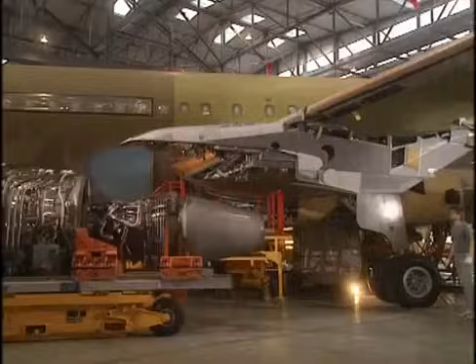The Airbus company, an international alliance of many aviation companies, came into being in the early 1970s and has grown steadily in stature until now, when most of the world's airlines fly some of the Airbus range of aircraft. There has been a design genesis that has encompassed short-haul, mid-range and long-haul solutions, and some notable variants. We investigate just how this success story has come to pass by focusing on the planes that are Airbus.

As soon as Wilbur and Orville Wright had landed and retrieved their craft at Kitty Hawk in the USA in the early part of the last century, the next questions were raised. Higher, further, faster, better. They had begun a chain of events that would change the world. There was a dramatic increase in the number and types of flying machines, some weird, some wonderful, but all exploring ways of getting men into the air in a powered and controlled manner.

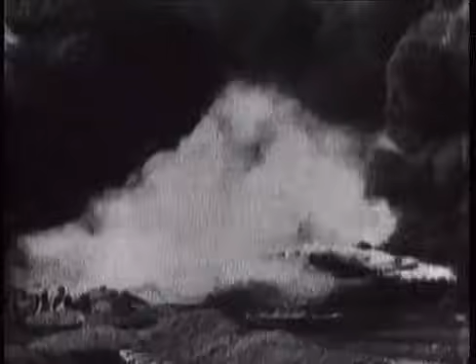Power and control were the main issues, and once the basic elements of taking off and landing had been mastered, the aspect of control became the next obstacle to aircraft development. World War I saw a rapid increase in technology as the warring nations sought to harness the advantage of powered flight. Britain, France, Germany and the USA formed their own air corps and produced relatively robust, efficient fighting machines. The wood, string, levers, wire and cloth had become lethal weapons in their own right.

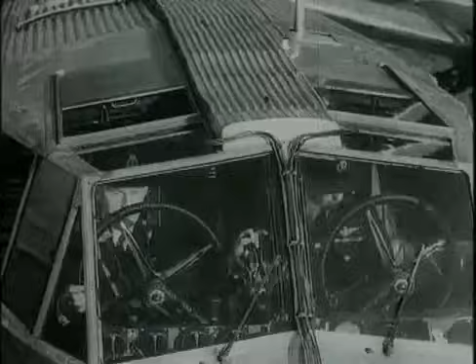The first transatlantic crossing in 1919 by the intrepid Englishmen Alcock and Brown in their slightly modified Vickers Vimy bomber aircraft caught the eye of the general public. Aircraft became fashionable and exhilarating fancies for those who could afford and dare to fly them, and air travel became a viable prospect. Aircraft that could carry a reasonable number of people as well as mail began to emerge, and with them blossomed the airline industry. To travel further with more people, bigger aircraft with more engines were built.

The open cockpit, wood, stick and wire, giving way to aluminium, glass and complex controls. Airline comfort and elegance reached its peak with the huge seaplanes, setting more and more records for distance and comfort, relying on the water for their takeoff and landing.

Civil aviation came to a sudden halt when World War II erupted. All focus was on the production of military machines, especially fighters and bombers. It was the accelerating development of the bomber with its need to carry a large payload over a long distance that formed the basis of design work for the new era of civil passenger aviation. But the jet fighters of the Luftwaffe and the RAF ushered in a new era of flying.

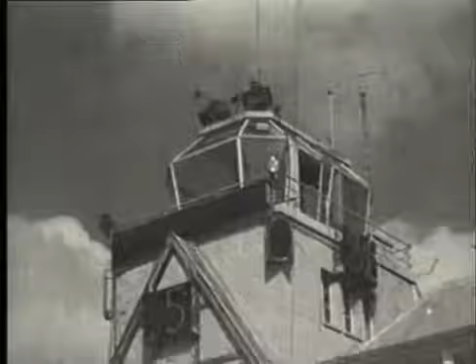Germany, France and England were almost bankrupt at the end of the conflict. Civil aviation was too much of a luxury, and European airlines initially had to make do with wartime aircraft. The manufacturing might of America had not suffered so badly, and so America was able to stake an early lead in the race to dominate the skies. Companies such as Boeing quickly used multi-engine propeller aircraft on internal flights, and the all-important transatlantic route became the key to large airline progress.

European companies concentrated on smaller routes on the continent until the arrival of the de Havilland Comet in the late 1950s, the first jet airliner in commercial service. In quick succession, the aircraft companies of Britain, France, Germany and Europe began building short-haul jets that proved economical, comfortable, reliable and efficient.

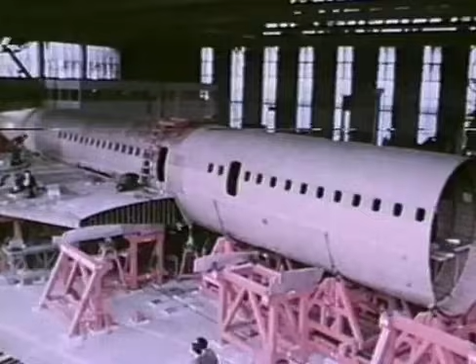In the mid-1960s, the EEC slowly came into being as European nation after nation signed up to the common market. The British and French governments recognized that working together could give better results, pooling ideas, technology, and expertise towards a common goal. Instead of trying to go bigger than the Americans, then why not go faster across the Atlantic? Enter Concorde, the world's first supersonic airliner. The Anglo-French creation was a technological masterpiece. Flying east to west across the Atlantic, you could actually land in New York 1 hour before you set off.

The plane was applauded worldwide and won great acclaim for its designers, but it never became a commercial success, Air France and British Airways being the only airlines that ordered and operated Concorde. The American authorities initially made it difficult to obtain permission to land near New York, a harbinger of difficult times ahead. The seeds of European cooperation were sown, but the Americans still dominated the aviation industry.

In 1967, French, German and British governments announced plans to build a European aircraft. The aim was also to challenge the Americans. However, a combination of politics, the economic legacy of Concorde, and the costly TSR-2 fiasco meant that 18 months later, the British government withdrew support. Hawker-Siddeley Aviation rather bravely funded the building and design of the wings themselves for the new Airbus, until the company was merged with BAC to become part of British Aerospace in 1977.

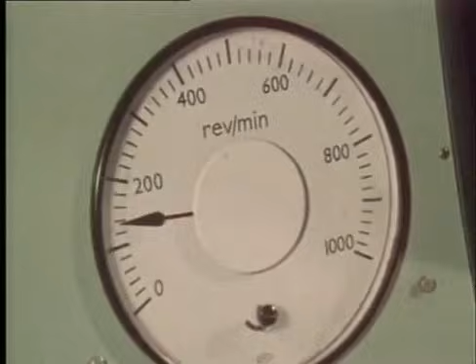At the Paris Air Show in May 1969, the A300B, the world's first twin-engine wide-body jet, is launched. It is to carry up to 250 passengers in a comfortable two-class layout, and later that year, Airbus secures its first potential order for 6 A300B2s, with a letter of intent from Air France.

December of the same year saw the Airbus Industrie GIE officially formed between Aerospatiale for France and a grouping of Germany's leading aircraft and manufacturing firms, later part of Deutsche Aerospace, with VFW Fokker of Holland and Hawker-Siddeley of Britain becoming associate partners.

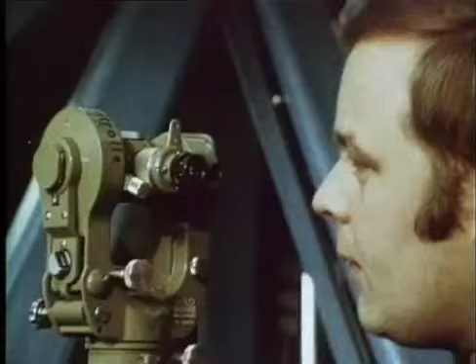Airbus Industrie was to provide a single sales, marketing and support network for Airbus customers. For the first time, not only was a brand new aircraft about to be produced, a brand new company and business concept too was to emerge, spanning many nations, languages, customs and expertise.

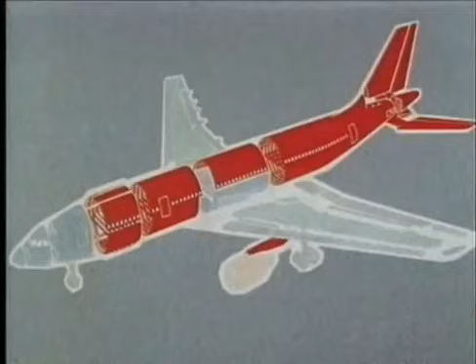The allocation of building sections of the aircraft was closely scrutinised and based on existing skills in national companies. Deutsche Airbus near Hamburg had responsibility for the main fuselage. Hawker Siddeley in Britain began work on the wings. Aerospatiale in France were the main assembly point in Toulouse, with the cockpit and centre section being produced at Saint-Nazaire. A few years later, the Spanish company CASA would come on board to build the tailplanes in Madrid.

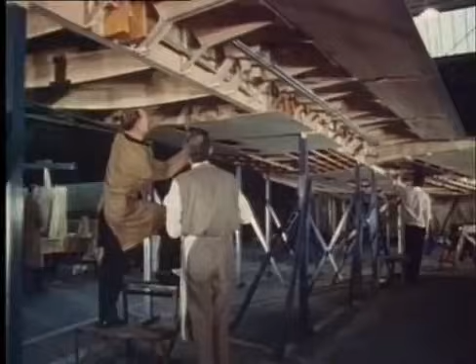In the late 60s and 70s, it must be remembered that there was not the technology available to today's designers. Wooden mock-ups were still made of the wings by Hawker Siddeley. Computer simulation, or CAD, was still a dream. Feet and inches, pounds and stones still vied with millimetres, kilograms and kilometres.

Today, a designer can email or video conference immediately with a colleague in Toulouse or Holland. Information, queries and ideas can be shared instantaneously via the internet. Back in the late 60s and 70s, the slide rule was king, and the experience gained from the early jets and Concorde production became invaluable. Testing was generally done to destruction to ascertain stress capabilities, even simulating a bird strike using a special air cannon.

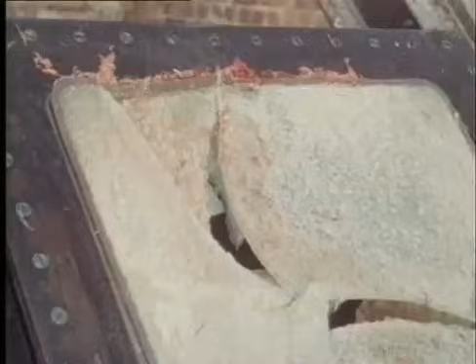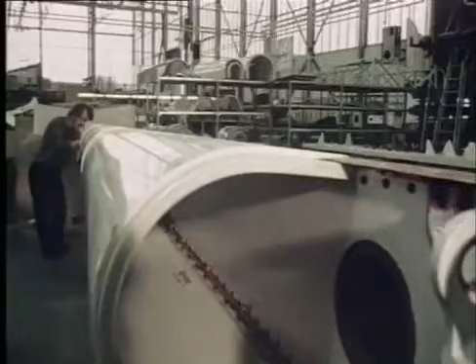And as none of the companies had successfully produced a wide-body jet airliner before, the risks were enormous. It wasn't just the technology that was needed to make this project happen. The people and expertise, both on the technical and management side, were equally as important. To successfully combine the skills, ideas, fears and strengths of several nations, companies required great tact, diplomacy and clarity of vision. In a series of groundbreaking moves with parallel moments of uncertainty and optimism, the first A300 began to take shape. It was the first wide-body jet of its type ever, and the first airliner ever to be built by several nations at once.

Immediately, there were difficulties. The first choice engine, the Rolls-Royce RB211, was dropped after Rolls sold the design to the American TriStar jet and lost interest in the Airbus project. In a remarkable yet pragmatic turnaround, Airbus arranged to test the American-built General Electric CF6 engine on a B-52, found it to be remarkably fuel-efficient and powerful, and incorporated it into the design. The engines were further tested at extreme temperatures and conditions designed to highlight any possible flaws.

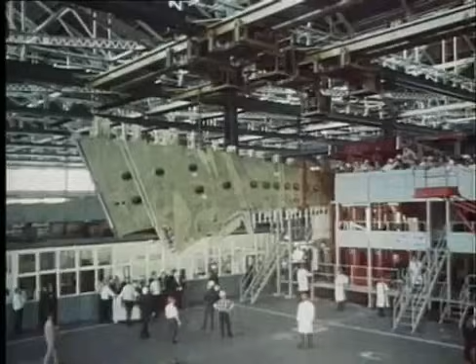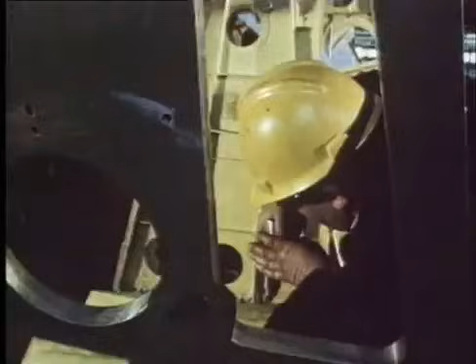The spirit of cooperation and dedication to the cause pushed Hawker Siddeley to introduce expensive new digital tooling machines, crude by today's standards, but at the time revolutionary and symbolic of the highly technical and energetic approach to the project. Wings were built in vertical jigs, with the leading and trailing edges fitted separately. Airbus pioneered the use of advanced composite materials on the A300B, and CASA in Spain began incorporating them in secondary structures such as tail fins and leading edges.

Deutsche Airbus produced the central fuselage in huge jigs, again with little computerized technology, a testament to the skill and engineering expertise of all involved. A full sense of European cooperation was beginning to emerge, and there was a certain pride in being part of a new special international community.

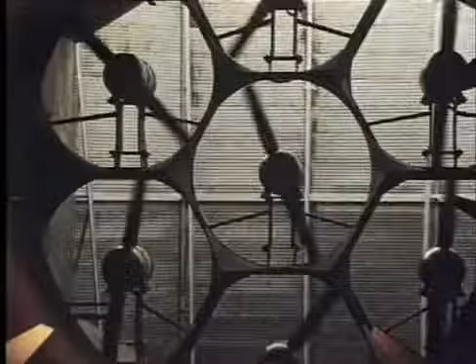The sites were widespread. Hawker in Chester, England, Deutsche Airbus in Hamburg, Germany, Aerospatiale in Saint-Nazaire, northwestern France and Nantes, and of course the final Airbus assembly plant in Toulouse, southwestern France. Designing the separate sections and building them was one thing. Getting them to Toulouse for the final assembly was another.

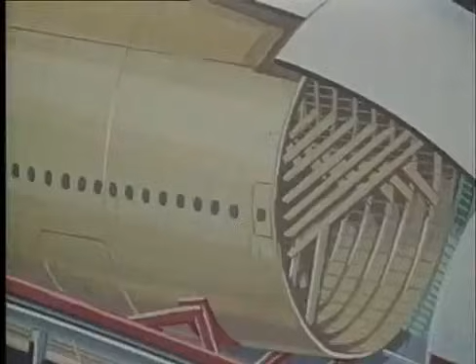With their first aircraft in several pieces and a letter of intent from Air France for 6 A300B2s, there was no time to spare. Obviously, air transport was needed to carry the sections to and from the various sites, and initial procurement made, but no one could wait for an aerial transporter to be built or adapted. So road transport and ferries were used.

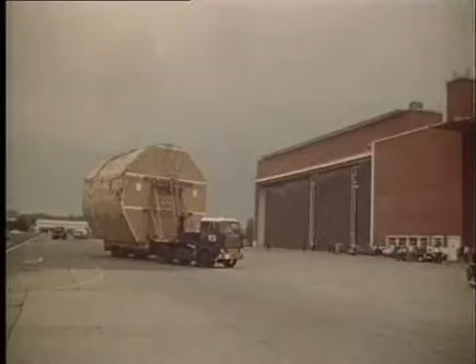The huge loads caused a lot of excitement and chaos on the road, as phone lines, power lines and trees were always an obstacle. But the sections had to get through to the plant for assembly. Many people watching the spectacle did not comprehend that they were seeing the unification of a pan-European project, as the huge loads gently nudged their way through villages and towns day and night. This is still the case even today on routes to and from the airports.

Conscious of the need for speed in 1972, and again with remarkable boldness, to improve the transportation process, Airbus bought and modified an American Boeing Stratocruiser, followed quickly by 3 more. In 1972, these 4 Super Guppies began commuting between the Airbus plants. The transporters were powered by 4 Allison 501 propeller turbines, derived from the Boeing model B377 and also used in the NASA spaceflight programs.

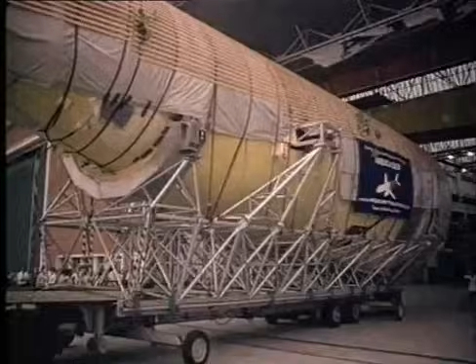As Airbus Industrie grew with rising production rates, the Guppies eventually arrived at the limit of their capacity and age. So, Deutsche Airbus and Aerospatiale formed the Special Aircraft Transport International Company, SATIC, in October 1991, and began to develop one of their own aircraft to become the new supertransporter. This arcane but practical transportation got the parts of the first Airbus A300 to the Toulouse plant, and work began on assembling them immediately.

1972 was a busy year for Airbus on many fronts. True to its original concept, Airbus Industrie was not just building aircraft, it was selling them too. Mock-ups of the interiors were made to show prospective customers what could be done with this wide-bodied airliner. Training of pilots began in earnest with the A300 simulator, setting in motion the practice of allowing pilots to cross-train from type to type with less difficulty and introducing the early concept of commonality.

A short time after assembly began, Air France officially became Airbus's first customer, placing a firm order for 6 A300B2s, a 270-seat stretch version of the original A300B they originally requested. This order was followed sometime later by Spain's Iberian Airways. In January 1972, the Spanish company CASA is officially awarded the contract to build the horizontal tail parts of the aircraft and joins the consortium, taking a 4.2% stake and developing the use of weight-saving new composite materials.

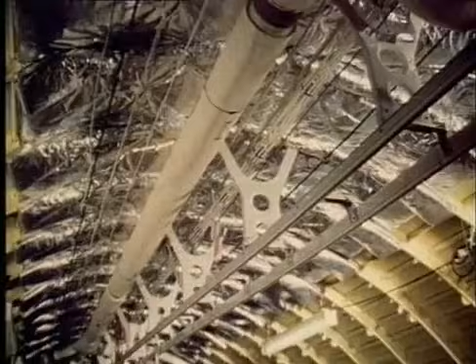As production of the A300 continued apace, the A300B4, a longer-range version of the A300, was launched, with a range of 3,000 nautical miles compared to the 1,200 nautical miles of the original A300. Its maximum takeoff weight at 165 tons is also greater than that of the A300B2. As well as the introduction of the composite sections of the aircraft's fin, leading and trailing edges and radome, the A300 also featured advanced rear-loaded aerofoil, giving a greater aerodynamic efficiency of the wing, and full flight regime auto-throttle and automatic wind shear protection, putting it well ahead of its competitors.

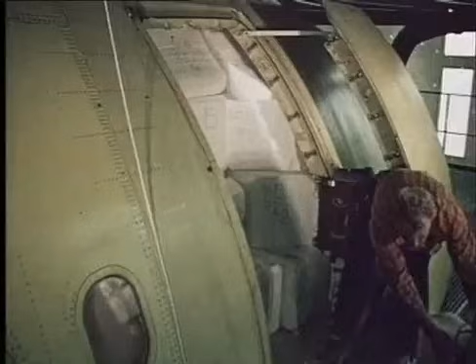The rollout was performed jointly with the appearance of Concorde Mark II. A300 was the airline industry's first twin-engine wide-bodied aircraft, and it soon began to be noticed. Detailed testing of all areas followed. The cabin resistance to air pressure was calibrated. Foam blocks were used to reduce the volume of interior space, so less air is needed and a more accurate result obtained. In these pre-computer design days, hydraulic rams were used to simulate and exceed the stresses that could be imposed upon the airframe. Early punch code computers recorded the data.

The A300's maiden flight took place on October the 28th, a month ahead of schedule, despite several delays due to bad weather. The flight crew of Captain Max Fischl, Bernard Ziegler, Gunther Scherer, Pierre Caneill and Romeo Zinzoni nervously began pre-flight checks.

The A300, the first Airbus aircraft and first wide-body twin-engine jetliner, took off at 10:30 a.m. local time from Toulouse Airport for a mission lasting for 1 hour and 23 minutes. A thorough in-flight check of all systems was undertaken, both on board the aircraft and from the supporting teams.

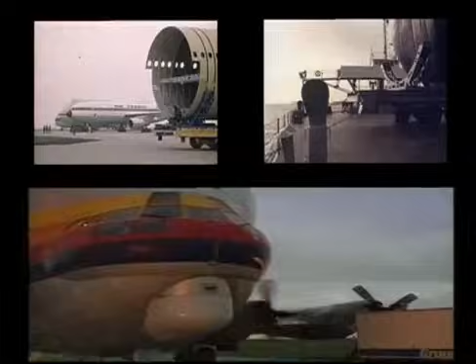In March 1974, the A300B2 received certification from French and German aviation authorities, ahead of schedule and on budget, which meant it could be delivered to its new owners. Air France took delivery on the 10th of May, entering the A300B2 into service on the 23rd by flying from Paris to London.

The aircraft now began a whistle-stop sales tour of the world's possible clients, landing and taking off at major airports and air shows around the globe, especially North and South America. Nothing sells an aircraft like the aircraft itself, and the orders start to roll in as the Airbus story accelerates.

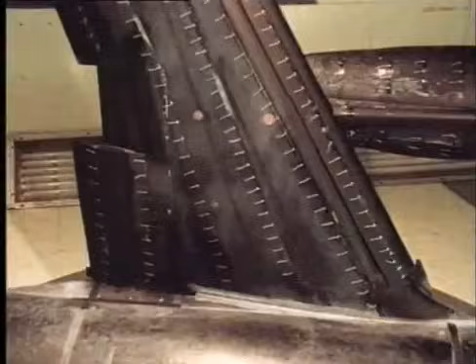Development work, however, was forging ahead, and the Cat 3A Autoland system was added to the A300, allowing the aircraft to land automatically in poor visibility. It took a former NASA astronaut, Frank Borman, heading up Eastern Airlines, to be the first American airline to step up to the mark and take a leasing deal on 4 A300s in May 1977.

The US market had started to crack, and 11 months later, when Eastern ordered 23 A300s with a further 9 on option, the rest of the world finally began to take the Airbus consortium seriously. More orders came quickly, and Airbus became established as a lead player in the airline business. As the product range was developing, taking on board new technical innovations and adapting to more markets and customer demand, so the company itself was developing.

The British air industry in the late 1970s underwent a major shake-up, and after several mergers and acquisitions, including the takeover of Hawker Siddeley, British Aerospace was formed, and joined Airbus Industrie in 1979 as a full partner, taking a 20% share, raising the profile and capability of the European venture and firmly uniting Europe's leading aircraft manufacturers. Just prior to this, the smaller but longer range A310 was launched, with even more technological advances.

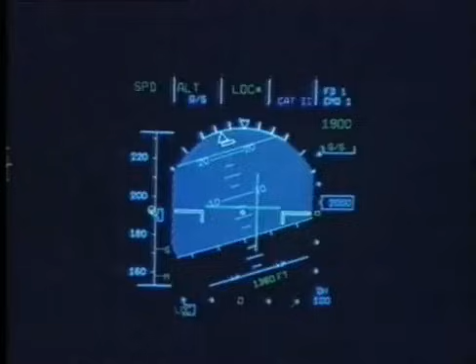With the A300-600 and A310, Airbus first develops the concept of commonality. This meant that for the first time, a twin-aisle aircraft could be piloted by a two-man crew, using instruments located in front and above, without the need for a third crew member, usually referred to as the flight engineer.

The introduction of cathode ray tubes, or CRTs, was also a revolutionary innovation. The old dials and needles were soon to become a thing of the past. Airlines around the world began placing orders for this aircraft, from Saudi Arabia to American Airlines. Airbus established its presence worldwide and as a world leader.

The aircraft industry has its own idiosyncrasies. Large freight carriers such as FedEx, UPS, DHL, TNT and others were looking for a freighter, and they selected the 222-inch fuselage cross-section for the original A300B jetliner. This sizing not only created one of the most comfortable passenger cabins ever designed, it also provided spacious lower deck holds, capable of accommodating the industry-standard LD3 containers side by side, or standard pallets, as well as a voluminous main deck with excellent cargo capacity.

An A300B4 configured as a freighter has a 43 metric ton cargo capacity at a range of over 2,000 nautical miles, 3,700 kilometers. And 1978 sees the launch of the convertible A300B4 passenger cargo aircraft, aimed at the developing Middle and Far Eastern countries. These additional markets were to prove useful to Airbus Industrie as the passenger markets fluctuated in their buying cycles.

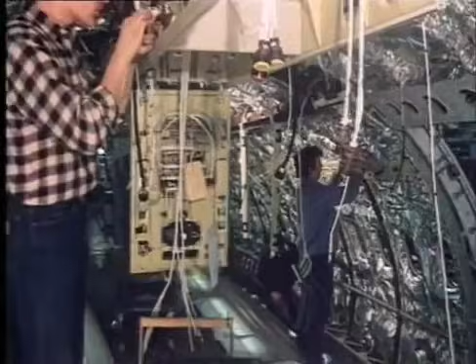The A310, seating 218 passengers, aims to offer airlines a smaller, longer-range alternative to the A300. Its launch shows Airbus to be more than a one-aircraft manufacturer. The commonality factor means that essential parts, sections, procedures and training can be shared by aircrew and ground crew, not only saving on initial cost, but also increasing enormously the after-sales support and service offered by the company in all parts of the world. Airbus again went up a gear in the eyes of the world's major airlines.

In 1981, the first A310-200 rolls off the final assembly line in Toulouse, almost 10 years after the rollout of the first Airbus aircraft, the A300B. Only 6 computers are needed to run the aircraft's autopilot, autothrust and flight director, as opposed to the 18 computers required on the A300B2 and A300B4, which used analog technology.

The A310-200 entered service with Swissair in April 1983, and almost immediately the go-ahead is given for the A310-300, which again incorporated new innovations, such as using composites in primary structures like the fin, and becoming the first civil aircraft to feature the drag-reducing wingtip extensions.

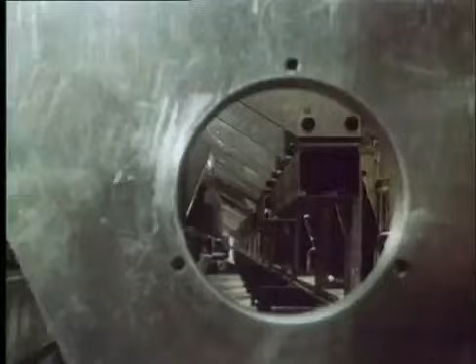Within the family structure, the longer-range A300-600R has been developed, giving longer range and aimed at a definite market, the Americans. From the early, heady days of optimistic dreams and challenging political and technical reality, the team at Airbus has ushered in a new era of aircraft, broken into new and bigger markets, and proved themselves capable of taking their place at the leading edge of aircraft design, manufacture, production and delivery. And the story is only just beginning.

Having begun to establish itself as a world player, Airbus looked at the medium-haul range in different areas of the world. And to replace the aging global fleet of existing aircraft, they set about designing the A320 family of twin-engined, single-aisle jets.

The A320 was revolutionary in many aspects. It was the first to be completely designed on computer, the first to make significant use of composites in major parts of its airframe. It introduced the forward-facing cockpit with cathode ray screens, and it was the first to feature fly-by-wire technology. To keep up the momentum of the development cycle, one A300 was fitted with most of the new technical systems, including fly-by-wire, and advanced technical apparatus which help speed up flight testing and monitor results.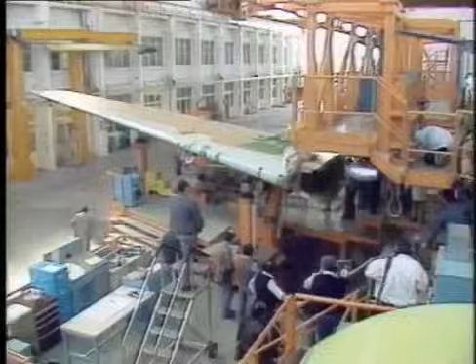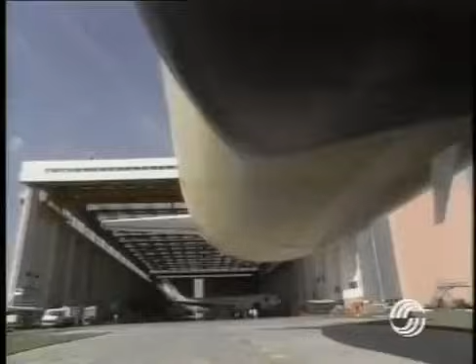In Toulouse 1986, the A320 began to take shape, the parts, as before, arriving from different European countries, CASA in Spain increasing the use of composites in the tail section. The engines chosen for this smaller jet were the CFM56 turbofan and International Aero Engines V2500. Section by section, the plane was assembled and tested on the ground. Resting on its own undercarriage is just one of the major steps for a new airliner. Prior to painting or public rollout and first flight, the aircraft is fitted with engines of the same weight to aid structural testing. These will be changed for the CFM56s later in December of this year.

The maiden flight takes place early next year, February 1987. Europe's Airbus 320, the third airliner of the range so far, is about to take to the skies for the first time. Past success with the A300 and 310 aircraft, and Airbus's reputation, mean that orders for the new jet are already accumulating. The highest ever figure of orders placed, 600 so far, before the aircraft completes its commercial certification program. Happily, the maiden flight is completed without any major problems, and certification and marketing begin.

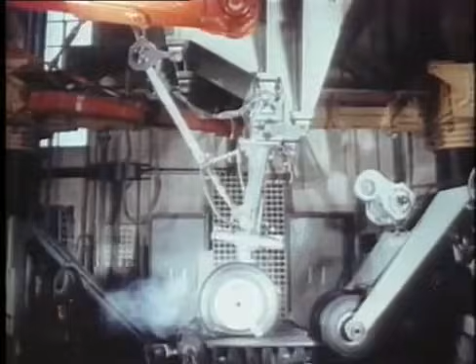Extreme can also mean cold, very cold. The Arctic wastes of Sweden provide night temperatures of below -20 degrees centigrade. After a night and a day in these conditions, the aircraft is found to be working perfectly. One of the more dramatic tests involves the skid rail and rear fuselage testing, as well as repeat heavy landings and takeoffs with the undercarriage. Even the air cannon is used to simulate bird strikes against the windshield, and the engines also undergo stringent testing with foreign objects.

One important aspect of the A320 testing involves monitoring the crew for stress and behaviour patterns with the new technologies. All these and more tests are thoroughly applied, and finally the aircraft receives its certification.

Rollout of a new aircraft is a very prestigious affair, akin to the launching of the great ocean liners of the past, especially when Airbus is the symbol of European cooperation and technical expertise. Dignitaries from all over Europe and the world's media welcomed the dramatic rollout of the A320.

With the order books filling up and airlines from many nations taking up the short to medium-haul aircraft, production went into top gear. The various companies from around Europe producing the respective parts, transporting them with the supertransporter and assembling them in Toulouse. The technical innovations of this aircraft allowed it to be flown easily and efficiently on many routes, expanding air travel even further.

Production of the A320 rose to 10 aircraft per month as the world's airlines began to exploit the emerging short-haul market, competing directly with road and rail transport. Once the air industry's underdog, the fortunes of Airbus were improving dramatically. The A320 was the first civilian airliner to introduce fly-by-wire technology, a massive step forward in control and safety in the air.

In the early years of flight, sheer muscle power was all that was needed to operate the stick that controlled the aircraft surfaces. As aircraft grew larger, the control surfaces became bigger, and forces generated were too great for mere muscle. Some ingenious designs were incorporated to help this. One of the earliest steps to assisted flight control was with the flying boats. The wheels and pulleys involved became quite common in many aircraft of the time to deal with the sheer muscle power needed to maneuver these craft. Some seaplanes began to use electrical servo assistance for the control surfaces.

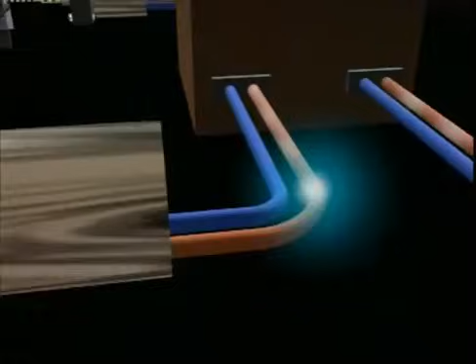With bigger aircraft and the civil aviation expansion in the 1950s, more control was needed. The Princess used electric servos to operate the different surfaces. Without these, she would not be capable of maintaining any flight stability or control. Soon, nearly all aircraft were using servos of one kind or another to operate the flaps, rudders and tail areas. These surfaces were, however, still linked to a complicated matrix of mechanical levers, rods and hydraulic motors activated by electrical signals.

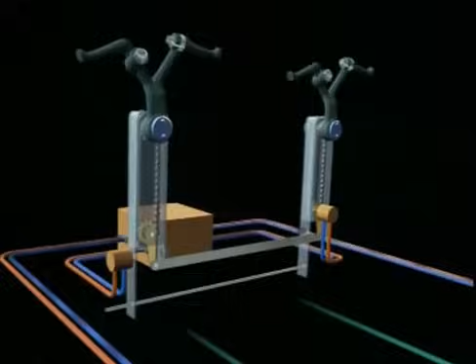The next logical step was to link the motors that moved the control surfaces to the cockpit by electrical wire. This was much simpler, lighter and safer. This also meant that the traditional columns or control yokes could be replaced by smaller side sticks. This revolutionary leap forward, along with the new display systems and forward-facing cockpit, made the A320 the most technologically advanced airliner of its time. I love flying our fly-by-wire aeroplanes.

William Wainwright, chief test pilot at the time for Airbus, takes us through some of the features of fly-by-wire. Now we have electric signalling, and I'm back to my small side stick, which I move with my fingertips, just like that. That moves the aeroplane. To illustrate what I mean about going to maximum performance easily, let's just slow down to our so-called alpha max, which is just before the stall. First of all, I need to reduce the engine thrust. Then the aeroplane slows down, but still with quite light forces.

I pull the stick fully back, and I keep pulling it back. There we are. It's going back towards 100 knots. And now all I'm doing is holding the stick fully back, and the aeroplane will stabilise just above the stall. Feel it's buffeting a little bit. That shows that we're not very far away from the stall, but we won't stall. We can sit there all day.

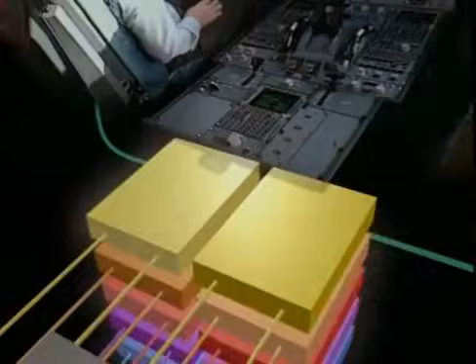Safety is obviously of paramount importance, and in order to ensure that there are no technical failures with these systems, 5 separate computers are used in the control system, each individually capable of assisting the pilot, and to provide even greater redundancy insurance, each computer is comprised of 2 units, one monitoring the other. To provide an additional level of security, the computers are designed and built by different manufacturers and programmed by different software teams, so that any unforeseen technical faults will not affect all the computers on board.

They also have a direct benefit to the human element of flight. They help me by making the aeroplane much more pleasant to fly. They smooth out all the nasty characteristics that some aeroplanes have, like big trim changes with speed or weight, changes in pitching moments with applications of thrust. That can all be taken out by these computers.

The computer systems also introduce the benefits of commonality in the Airbus family, making the aircraft very similar to fly. There are also several benefits to airline companies with this kind of technology. This commonality of flight systems was also applied to the airframe, and the adaptability of the A320 is evident in later models.

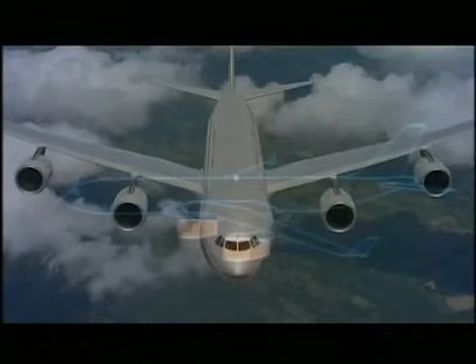The new family of A330s and A340s were aimed at the medium to long haul and also the very long haul market. The common use of fuselage, cockpit and main wing meant that Airbus could cut development costs and time. Customers could also achieve greater reliability, efficiency and service.

Savings were made in spares, training and maintenance, as well as operating costs. The main difference between the types was based on the number of engines, and at the time of launching these models, much technical research was conducted to achieve maximum efficiency in this market, explained here by one of the early

design engineers. We'll start with a common airframe featuring a twin-aisle fuselage seating 300 passengers and dimensionally identical wings and tail surfaces. And we'll look at the three configurations currently offered to airlines: the twin, the quad, and the tri-jet.

Extra weight at the back there, both due to the engine itself and the need to strengthen the rear fuselage to carry it. So to redress the balance, the wing must be placed further aft. Now, the length of the moment arm and the dimensions of the tail surfaces are directly linked. If the moment arm is shortened, it'll reduce the tail's efficiency. To compensate, we need either bigger, draggier tail surfaces or a complex full-time longitudinal stability augmentation system.

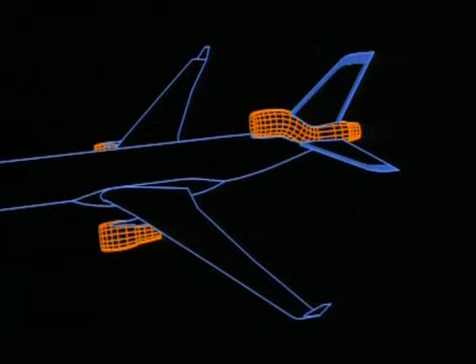So Airbus concentrated on two designs, the twin-engine wide-body A330 and the four-engined wide-body A340. If four engines are reduced to two, the two will need to be larger, much larger in the case of the twin designed for very long ranges. Why? Because the extremely heavy load carried calls not only for high power, but for very high reserve power to meet the single engine out requirement.

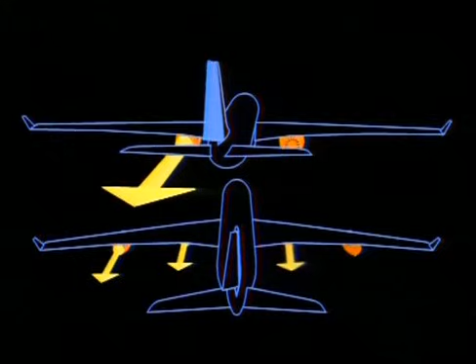In a twin, an engine failure results in a 50% power loss. And for the long-range twin, this must be offset by very high thrust indeed, on one side only. The quad is much less affected, with one engine representing only 25% of the installed thrust, and the reserve power is more evenly distributed. The imbalance that both aircraft now suffer must be compensated for by the rudder. The long-range twin rudder has a much more demanding task and must be made bigger, and the consequence? Higher drag in the cruise.

Research and development to match potential customer requirements was begun as early as 1987. And as a testament to Airbus's information flow, input was also included from airlines' own representatives. The increasing use of better computer design systems and electronic communications built on the earlier technological advances and helped enormously in decreasing testing time and refining production methods. The very early methods of wooden mock-ups, cabin interior construction and expensive wind tunnel tests began to look very dated.

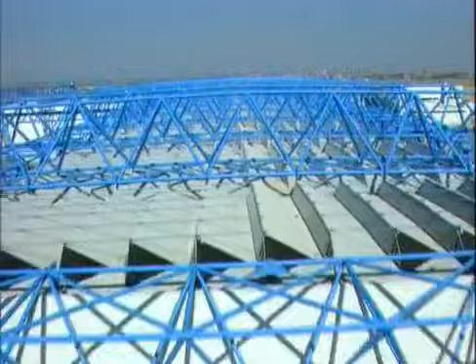To house such a large enterprise, another production facility was commissioned and additional investment raised for the next stage of the Airbus expansion. The main production area for the 330-340 at Toulouse became the largest single-span building in Europe. Called Clément Ader, after the French aviation pioneer who invented the word avion, this massive building heralded the next expansion phase of Airbus Industries. The production techniques were developing, as was the partner base.

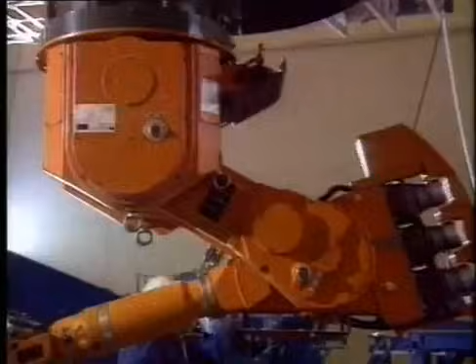Now using a modular assembly process instead of the traditional production line, parts of the Airbus can be assembled in different hangars and fitted together at specific production points. The influence of new technology is evident as robots and computers are now heavily used in the design process, cutting and assembly. British Aerospace at Chester builds the wings for the A330-340 program, although final assembly is now done by Deutsche Airbus in Germany.

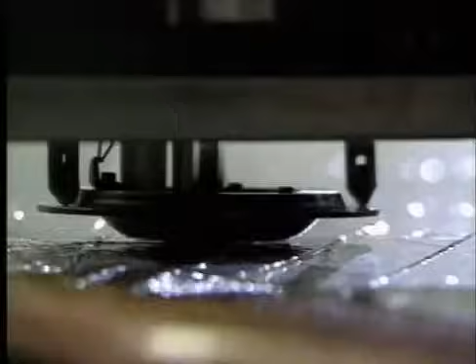Deutsche Airbus, as part of the Deutsche Aerospace, assemble fuselages in Bremen and Hamburg, as well as assembling the A321. Aerospatiale also produced several sub-assemblies such as cockpits and central sections, as well as final aircraft assembly in Toulouse. CASA in Spain have increased their workload, especially with their high-tech composite parts.

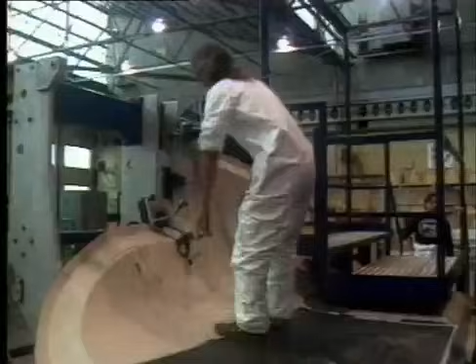But Airbus has also expanded its partner base to include wider international partners, such as Belairbus, who produce these honeycomb parts. Canadair in Montreal and even Australian companies are now important subcontractors to British Aerospace and the Airbus program. Even as far afield as South Korea, parts are made for Airbus.

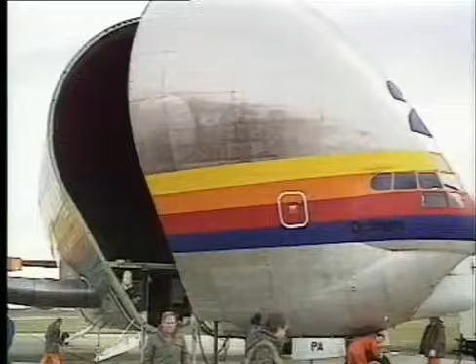There are several engine types for the A330-340 program. CFM56-5Cs are for the A340, while the A330 has a range of engine choices: CF6-80E1s, Pratt & Whitney 4000s and Rolls-Royce Trent 700s. The scale of production meant that the Super Guppy fleet was still employed to ferry parts around Europe.

But on the intercontinental routes, the Soviet-built Super Antonov was used to carry sub-assemblies. Again, trucks were used for shorter sections.

The Super Transporter came into service and was in constant use, ferrying sections of the new aircraft around Europe, from manufacturing centres to assembly plants in Toulouse, Nantes and Saint-Nazaire.

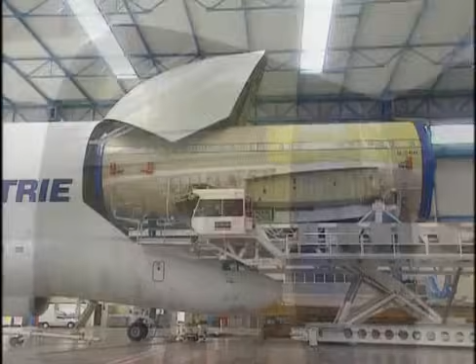The A340 was the first four-engined long-range aircraft to be developed in 25 years, and production of this aircraft and the whole Airbus Corporation now stepped up a gear. This speeded-up film shows some of the processes involved as the aircraft is assembled prior to rollout and testing.

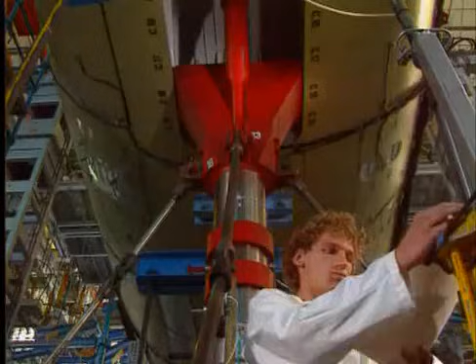Structural testing of fuselage, wings and other main parts is carried out on the ground at various points in construction. The aircraft frame is subjected to extreme physical stresses: the stretching, compressing and bending designed to test the construction beyond any limits it may encounter in flight. Its wings are bent to incredible angles until they finally break.

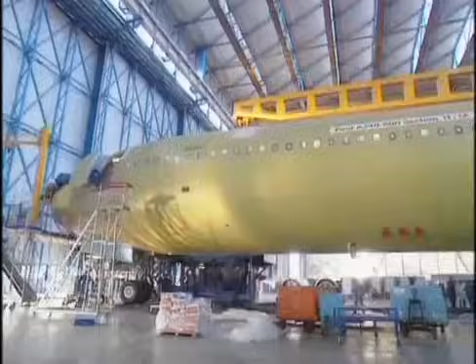After testing on the surfaces, the aircraft is rolled into the next hangar. The engines are added and more testing done on the frame, hydraulics and engines. These engines have to endure bird strikes, excessive water and ice.

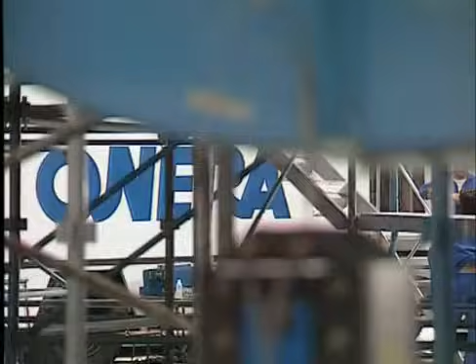All of the new components and features, such as the increasing use of composite materials, have to demonstrate their individual capability and are monitored not only by the Civil Aviation Authority, but by Airbus engineers, so that future models can benefit from the accumulated data. Only after these tests have been passed and full accreditation given to the results can the aircraft be rolled out for its first flight.

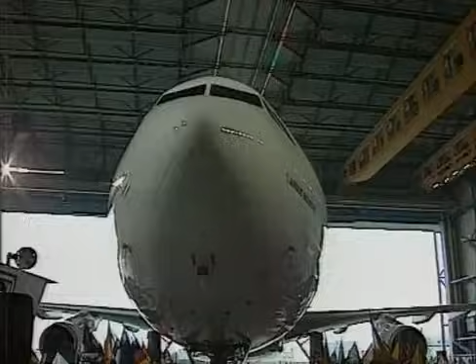Airbus 340 No. 1 was given her ground roll clearance in April 1991. More tests were conducted, and after full verification she was given her new paint job before the public launch later that year. Once again, the media and marketing departments got behind the launch of a new Airbus. The A340 was launched to the public in great style, sending a clear message to the airlines of the world that Airbus was up there with the long-haul big boys and here to stay.

Autumn 1991, and it's time to see if the engineers, designers and test teams have got it right. On October the 25th, 1991, all doubts were dispelled as the 255 tons of the A340-300 took off and successfully completed all of her inaugural in-flight tests. To increase range, the wings had been reinforced to carry more fuel and improved aerodynamically to cope with the increased takeoff weight.

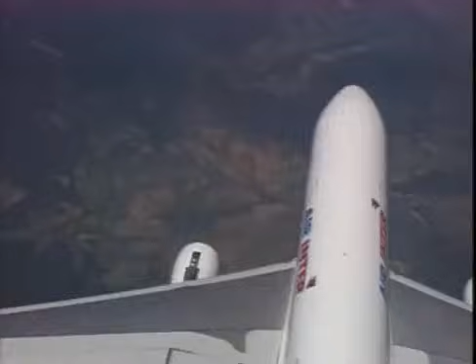The 340-200 obviously had 4 engines, but exactly the same wingspan of the 330s. The same fuselage, although a different length, similar cockpit, and carried 240 passengers, and had a range of around 9,000 nautical miles. Its sister plane, the 340-300, was just over a metre longer, had the same wingspan, carried 295 seats, and had a range of 7,400 nautical miles.

The 340-600 and 500 shared the same wingspan at 63.45 metres, although the slightly shorter 500 at 67.9 metres had the longer range of 10,000 nautical miles. Cabin interiors could be configured in several ways, from the smaller, medium-range 330 to the full capacity of the four-engined long-haul A340, which has luxury class, 6 abreast business class and 8 abreast economy class. And to help with possible 12-hour flights, there are also rest areas for aircrew.

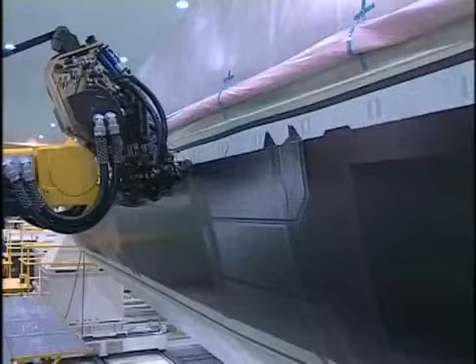This flagship of the 21st century was designed to be produced with the very latest in technologies, materials, systems, and industrial processes. The 555-seat A380 is the most advanced, spacious, and efficient airliner yet produced. It meets the most stringent international certification requirements and can carry 35% more passengers than its closest rival.

In order to measure passenger reaction, vast cabin mock-ups were taken to 8 major cities on 3 continents, and the views of 1,200 frequent travellers, male and female, and from a range of cultures and nationalities were listened to. And with far more floor space available, the A380 enables airlines to deliver unparalleled comfort in every class, with rest areas, ambient lighting, bars, and more open space for passengers to stretch their legs.

The A380 will provide passengers on major long-haul routes like London-Singapore and Los Angeles-Sydney with a new way of flying. The passenger may be the end user, but the airlines are the clients. And after the fullest ever consultation with potential airline companies, Airbus believe that with the A380, they can provide the solution for today and tomorrow's market requirements to satisfy airlines operating the world's major long-haul routes. Let's take a look at some of these benefits in more detail.

Airports are already scheduling into their development plans billions of dollars worth of infrastructure improvements. The A380 is an asset to these plans. Its greater capacity reduces the need for airports to duplicate existing facilities to cope with the rise in demand.

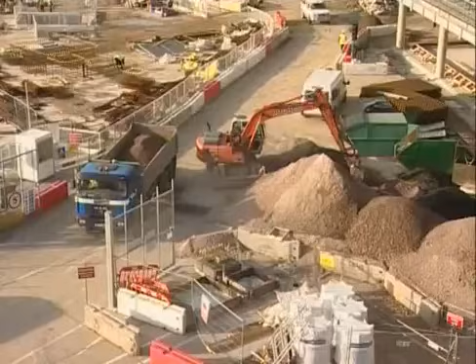If the opening ceremony was spectacular and the plane impressive, then the work being done elsewhere is truly amazing. Working just meters from one of the world's busiest runways and in the middle of a live airfield, engineers at Heathrow are working on a massive project to receive the new A380. Its wingspan is 15 meters or 50 feet longer than the biggest jumbos currently in service, and that's meant a complete rebuild of terminals for British Airports Authority in a race against time.

We're absolutely on schedule. Behind me is the new pier in Terminal 3. It will house 4 A380 aircraft stands and the gate rooms for the 500 or so passengers on each aircraft. This time next year this will be fully complete and we'll be ready for the first aircraft at Heathrow.

The piers to get passengers off not only need to be further apart, but two-storey to accommodate the double-decker Airbus. Parts of the runway and taxiways are having to be strengthened and widened, and with a capacity for more than 800 passengers, huge new baggage halls with long conveyor belts are being constructed. In total, BAA is spending £450 million to prepare for the arrival of the new craft.

It's predicting that in 12 years' time, the A380 will account for 1 in 8 flights, and with landing slots at Heathrow full, it's seen as the only way of increasing passenger numbers. This is an aircraft built for Heathrow. There's no two ways about it. We're going to see, I reckon, probably half the A380 operations in the world will be initially coming in and out of London Heathrow.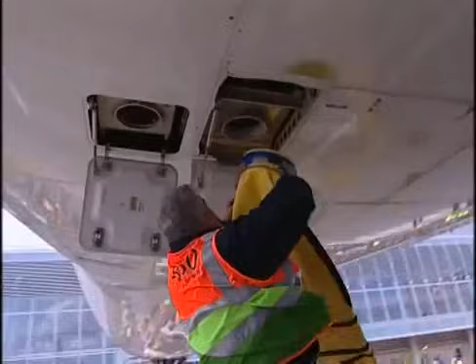Virgin has ordered 6 of the craft, but at the launch in France yesterday, the airline still had concerns that other airports had been slow to follow Heathrow's lead. Boarding the A380 will take no longer than existing large aircraft, and servicing the A380 will have minimal impact on current facilities, because its main deck lower doors and its ground service connection points are at a similar height to those of existing large aircraft.

The environmental issues have also been addressed by Airbus. The A380 was designed with the stringent noise and pollution controls of modern airports in mind. And its environmental friendliness goes beyond noise reductions. Its extensive use of composites, a greater proportion than in any other aircraft, means reduced weight and therefore lower fuel consumption, around 12% lower than that of its nearest competitor.

Indeed, the A380 will be the first long-haul aircraft to consume less than 3 litres of fuel per passenger over 100 kilometres, a rate comparable to an economical family car. Less fuel burn results in fewer emissions of gases into the atmosphere. Better aerodynamics and advanced technology means the A380 will be significantly quieter than other large aircraft, producing half the noise of its closest rival.

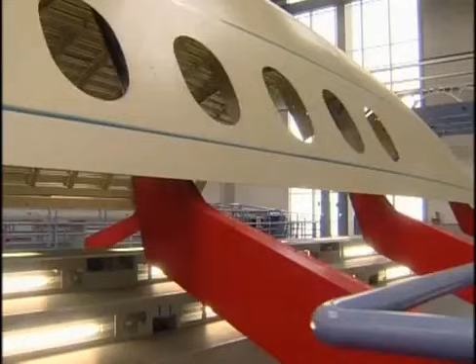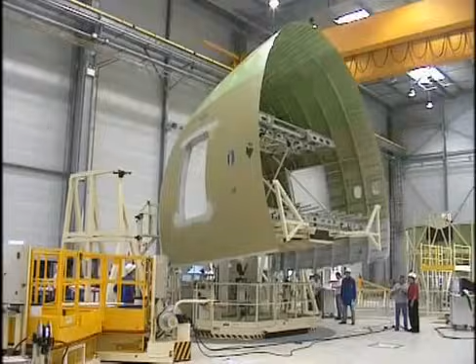The A380 family starts from a baseline passenger aircraft with a capacity of 555 passengers in 3 classes and a range of up to 15,000 kilometres, 8,000 nautical miles. It has an overall length of 73 metres and a massive wingspan of 79.8 metres. The double-deck fuselage is 7.14 metres in diameter, and when on the ground, the aircraft has a height of 24.1 metres. The freighter version, the A380F, will carry a payload of 150 tonnes, 330,000 pounds, over 10,400 kilometres, 5,600 nautical miles.

In true Airbus fashion, stretched, shorter and extended range variants of the baseline version will become available as and when the market requires them. The A380 is powered by 4 Rolls-Royce Trent 900 engines, or 4 GP7200 engines from the Engine Alliance, a General Electric and Pratt & Whitney joint venture, delivering a thrust of up to 81,500 pounds, 37 tonnes each. To date, 6 A380 customers have selected the Engine Alliance GP7200 engine, for a total of 82 firm aircraft orders. The aircraft has a maximum takeoff weight of 560 tonnes, a maximum landing weight of 386 tonnes, and a maximum fuel capacity of 310,000 litres.

Building on the success of its previous composite experience, some 25% of the aircraft is made from composites, 22% carbon fibre reinforced plastic, and 3% GLARE, a fibre metal laminate. And for the first time, not only are more primary structures made of composites than ever before, the centre wing box and rear fuselage are too.

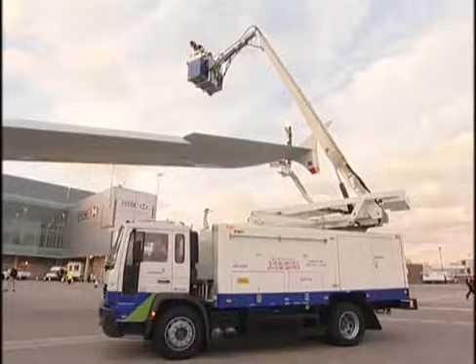Reliability and maintainability will be further increased through the use of new technologies, such as enhanced onboard central maintenance systems and variable frequency generators, which simplify the large aircraft's electrical generation network.

Another design innovation, using a 5,000 psi hydraulic system, means smaller, lighter pipes and electro-hydrostatic actuators, which ensure that the aircraft can fly and land in the event of a total hydraulic failure. Not only was this aircraft an avionic leap forward for the company, its production process also resulted in change.

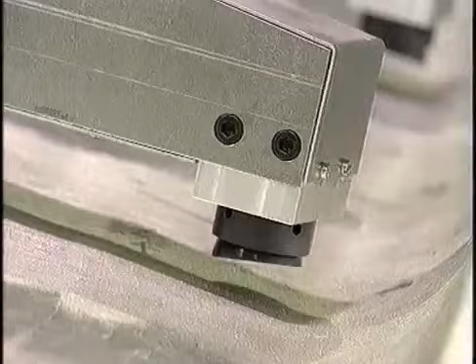The Airbus consortium had grown enormously, and in order to streamline decision-making and information flow even further, was restructured in January 2001 into a fully integrated company. French, German and Spanish interests were merged into the European Aeronautic Defence and Space Company, accounting for 80% of shares, while the successor to British Aerospace, BAE Systems, took the other 20%. Construction of new buildings in Hamburg, Bristol and Toulouse went ahead at breakneck speed.

Just over a year later, the French Prime Minister Jean-Pierre Raffarin formally opened the A380 assembly facility in Toulouse. Measuring 500 metres by 250, with a height of 47 metres, this massive new facility became the final assembly hall and static test site for the Airbus A380. It was here in January 2005 that the most advanced passenger aircraft ever conceived was put into final production.

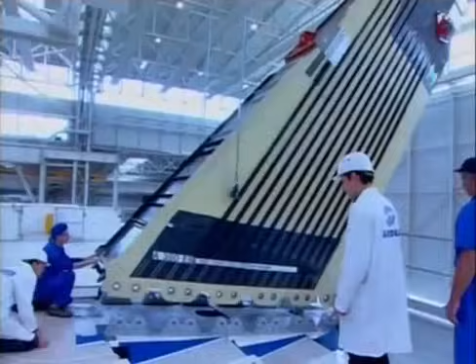Four months later, on April the 27th, the first A380 took to the skies, bearing the registration F-WWOW, and completed a test flight of 3 hours and 54 minutes. The truly international flight team were delighted with the results, and the full potential of the machine was beginning to be realized. A new dawn in aviation history was breaking.

Production of the new A380 got into full swing, but as usual, Airbus did not have it all its own way. Across the Atlantic, their arch rival in the long-haul market began previewing its latest model, the Boeing 787. In a complete reversal of the much earlier philosophies, Boeing elected to build their new aircraft not bigger, but faster, and able to access more airport hubs worldwide.

In Seattle, home to American aircraft building, they're about to start work on up to 3,500 of the new 787 Dreamliners. This is a mock-up revealing for the first time what it will be like inside, with new visual displays and passenger comfort. It will even have a new system that stops turbulence. Inside the new 787, it's radically different.

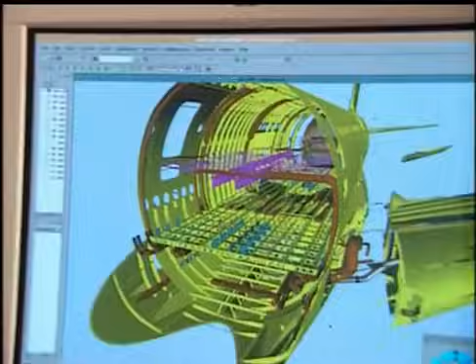It would be a very significant event for us to cancel those orders. But, you know, we have to review all our options at this point in time. With such a huge technical undertaking, breaking so much new ground in so many areas, perhaps setbacks of some kind are inevitable. But coming this far into the delivery schedule, airlines have to look at their own projections and make their own judgments on what to buy and when.

As share prices on the recently reorganised EADS Corporation plummet and competitors begin to steal promised orders, things look difficult for Airbus. The company that was once the underdog of the aircraft manufacturing world, yet produced a litany of successful and technologically innovative aircraft, culminating in the largest passenger jet ever, could be facing its biggest challenge yet.